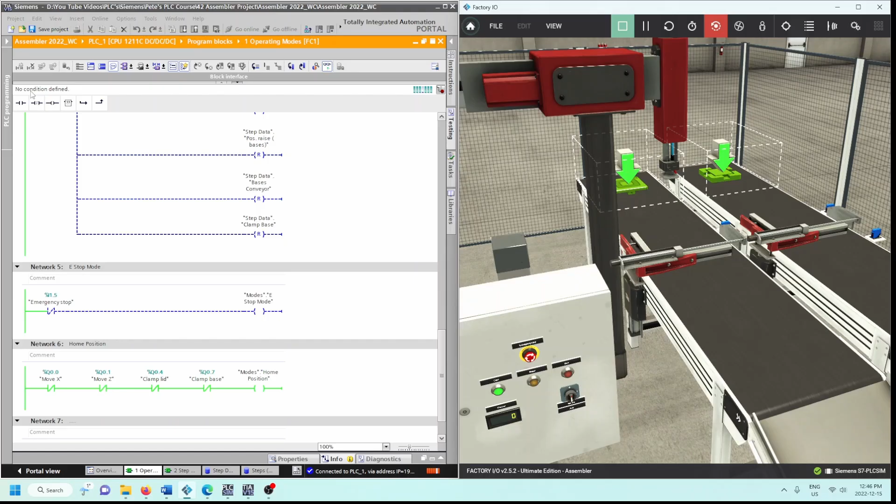Okay, let's take a look at our step definition now. So our first network right here is not going to be intuitive to you. So this is an addition that I put in here. So you can try it without this network and then try it with this network and see whether it works better for you. So in this case, every network here within my step definition moves a value right here.

This is going to move 1 into my database next step, right? That is found over here in my steps, and steps just has next step and current step, and we mentioned earlier that they're both integer values. Okay, so it moves it over into next step. You can see that the next network here, network number 3, moves 2 into next step, right? So each step value gets moved into next step.

Then at the top of the program here, so the scan is going to go down to the bottom, right? Move a value into next step. But I didn't want it to go like 4, 5, 6, right? Like go through a number of steps without being confirmed, and have me in control of the steps. So next step is then moved here, right? So next step goes into this move function, and next step is moved into the data block for current step.

And then I take a look at current step, right? So I have 2 separate databases, right? Next step and current step. And I can't go forwards until this has happened. The value that was moved into next step is moved into current step, and then I say, okay, is current step equal to 0? Is current step equal to 1? Is current step equal to 2? Okay, so hopefully you can see how this one for me was crucial in stopping the steps from sequencing through without me being in control.

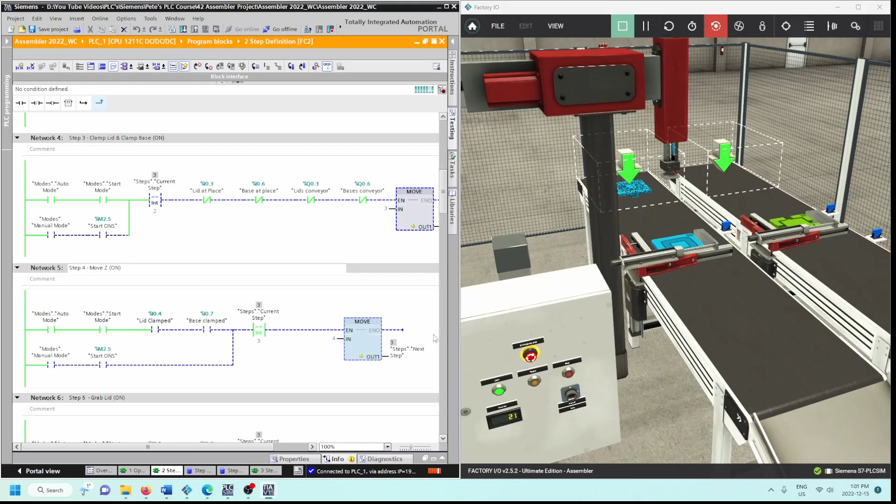Okay, next thing is to turn on the vacuum, so the grab lid. So in this case, for network number 6, auto mode is true, start mode is true. I'm no longer moving the Z axis. Okay, so it's come to a stop. The item is actually there, it's been detected, right? So I'm moving this down, item's been detected, turn the vacuum on, and I can only do that if step number 4 was my previous step. Okay, so that moves step number 5 into next steps. Beautiful. And then again, next step goes into current step at the top of the program.

And again, you'll see here for manual mode that all I've done is just put manual mode and the start one shot in parallel with all the initiating contacts here. As long as these are true and the previous step was 4, then move step number 5 into the next steps.

Okay, next one is that I want the clamp lid off. So once I've turned on the vacuum there, then I want this to release. So auto mode is true, start mode is true, the grab is true, so I've actually grabbed onto the lid there. Previous step was number 5, move 6 into next steps, and step 6 is going to turn off the clamp lid.

Okay, again, manual mode is just simply manual mode, and start one shot in parallel, going around the initiating contacts. As long as my previous step was step number 5, manual mode is true, start one shot has been pressed once again, then move 6 and clamp the lid. Okay, we'll see that there's no execution of anything. The execution of all this is in a separate function.

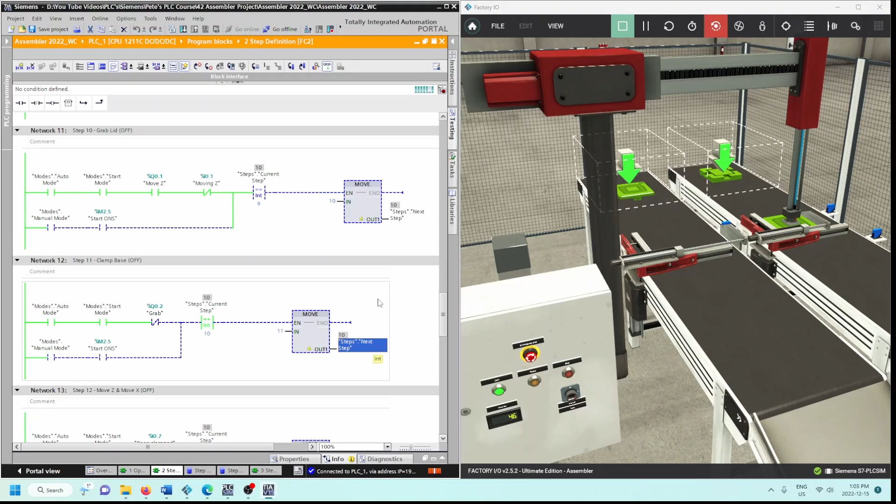I'm saving, resetting the circuit, and then going through each one to make sure that my automatic mode works before going on to the next network. Okay, so automatic mode, start mode is set. The grab is no longer true, so I'm no longer suctioning that component. Previous step was step 10, move step 11 into next steps. And again, just as I said before, manual mode and start one shot pulse are in parallel with all the initiating contacts. As long as this is pressed, previous step was 10, move 11 into next steps.

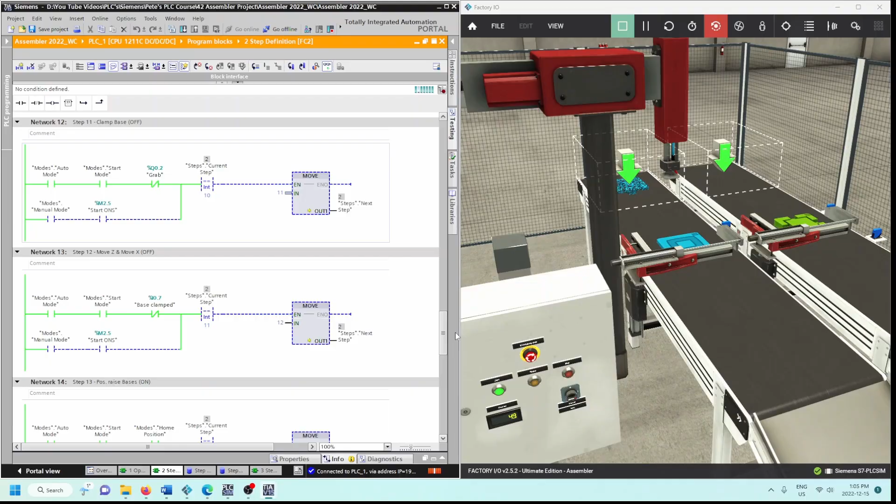Okay, next one, guys. As soon as I've let go of the part here and the clamp base has been released, then I want the unit to come up and back to the home position here. So at that point, auto mode is true, start mode is true. The base is no longer clamped. Previous step was step 11. So move step 12 into next steps and move the Z and move the X off, right? So that'll move it back to this position right here.

Beautiful. At that point, I want the positive raise bases to lift up. So that would be right here, right? So that lifted up. Okay. And again, that can only happen if the previous step was step 12. So step 13 gets moved into next steps and positive raise bases is on.

Okay, at that point, the next thing I need to do is turn the conveyors on, right? So auto mode, start mode, positive raise bases is true, positive limit bases is true. Step 13 was my previous step. Move 14 into next steps and turn the conveyors on. Okay, if I wanted to do that in manual mode, I would have to be set in manual mode and press the start push button once again.

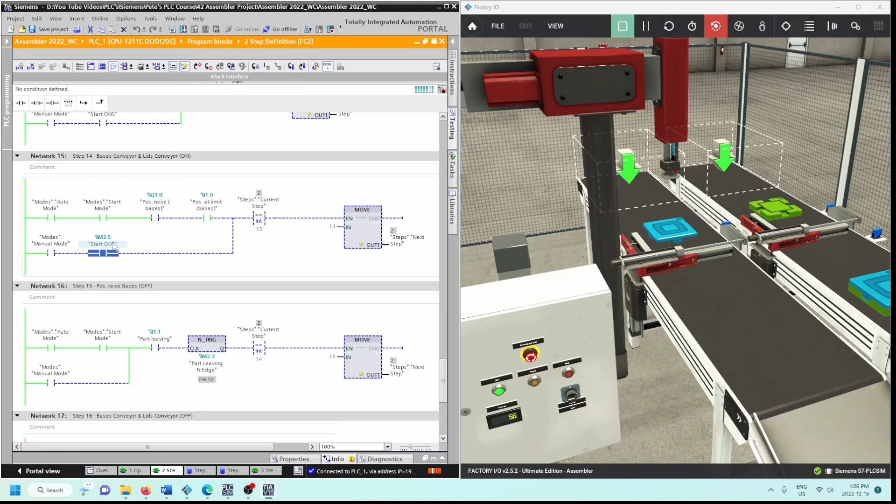Okay, from here on in manual mode, I no longer have to hit the start push button because it wasn't intuitive for me to have somebody press the push button to have this go down and to turn the conveyor off, right? So that's why that little hiccup there is there on the back end. So step 15 is the positive raised base is off. So auto mode is true, start mode is true, just like every other network.

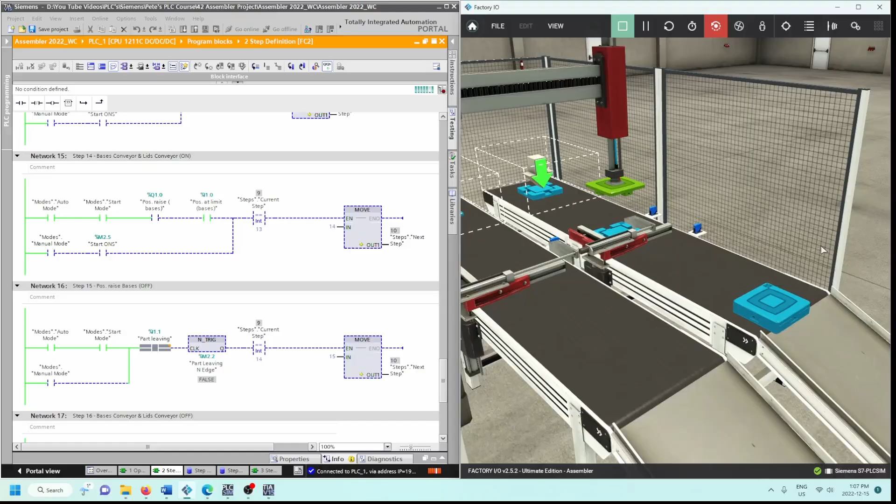Part leaving, so that is this sensor right here, right? So this guy right here, when the part is leaving, then the negative edge is tripped. So the part has to come back by, go to a 1, go to a 0, the negative edge is tripped there, and then the unit for the positive raised bases goes down. Okay, and it can only happen if the previous step was 14. 15 gets moved into next steps, and the positive raised bases goes down.

Beautiful. Then I want the conveyor to turn off. The reason for that was because I have parts still moving and they were smashing into here, so I stopped the conveyor there. Manual mode does that on its own as long as step 15 was true. In automatic mode, auto mode has to be true, start mode has to be true. Previous step was 15, and move 16 over to next steps and turn the conveyors off briefly.

Okay, that's that little brief hiccup you'll see, hang on, right here. Conveyor will turn off there, that little hiccup there. And that was just because in manual mode, I needed that to happen. If you can fix that for me, awesome, show me how to do it.

Okay, and then finally, I need to reset everything. I want to go right back to the top and have the sequence keep going. So auto mode is true, start mode is true, just like every other network. I'm back in the home position. So in the home position, if I go to my operating modes, my home position was that move X is off, move Z is off, clamp lid is off, and clamp base is off.

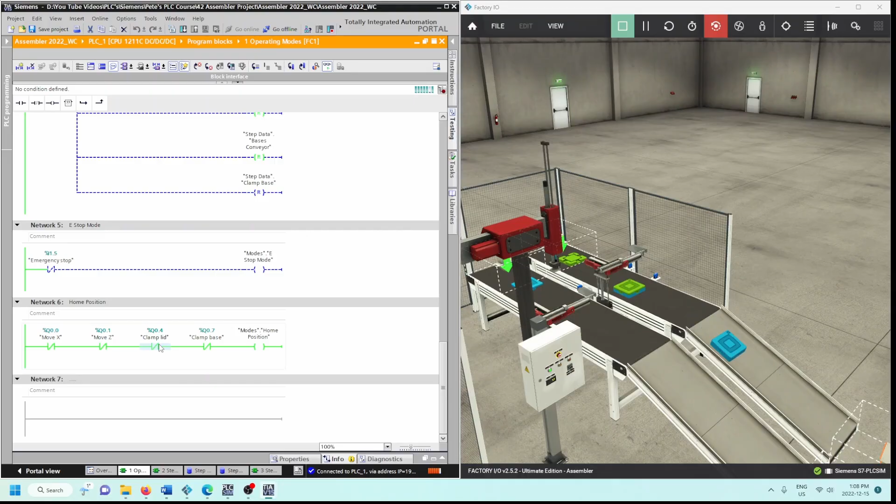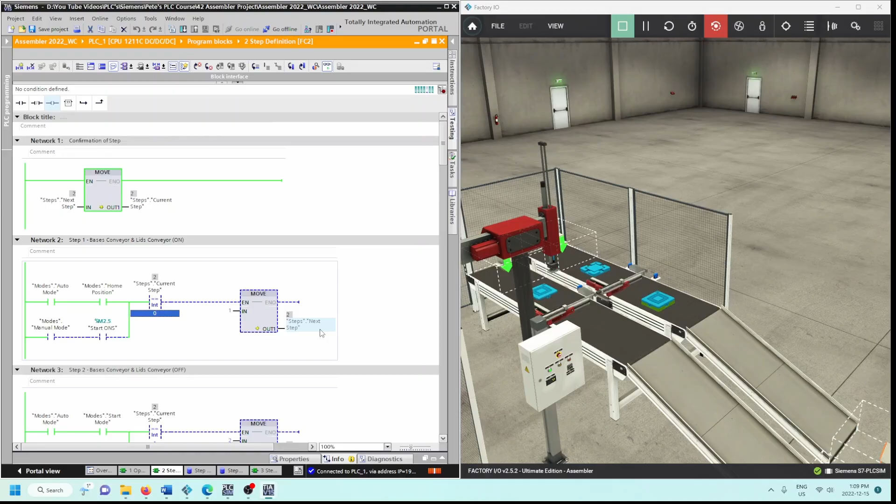So if those guys were true, easy now, and step 16 had already been set, then move 0 into next steps. And by moving 0 into next steps, then we move all the way up to the top here, starting here at step 0. And again, with all of these guys, it has to wait for each scan, and next step is moved over to current step, and then I can compare it to each of these values. So now the sequence keeps going.

So I would say that this program is pretty good so far. We have had 71 different parts come through, and we haven't broken it yet. Okay, let's see if we press the stop push button. So let me get this set up so we can press the stop push button.

Okay, at that point, everything stops. We're currently in step number 2. So when we press the start push button again, then we should move on to the next steps, right? So it should always hold that position for that step. When we press the start push button again, then we should keep going.

Okay, so there I broke it, right? So something was missing there for the stop. That's frustrating. So I'll have to take a look at my program. I'm not sure what was missing there. We were at 73, we were doing so well.

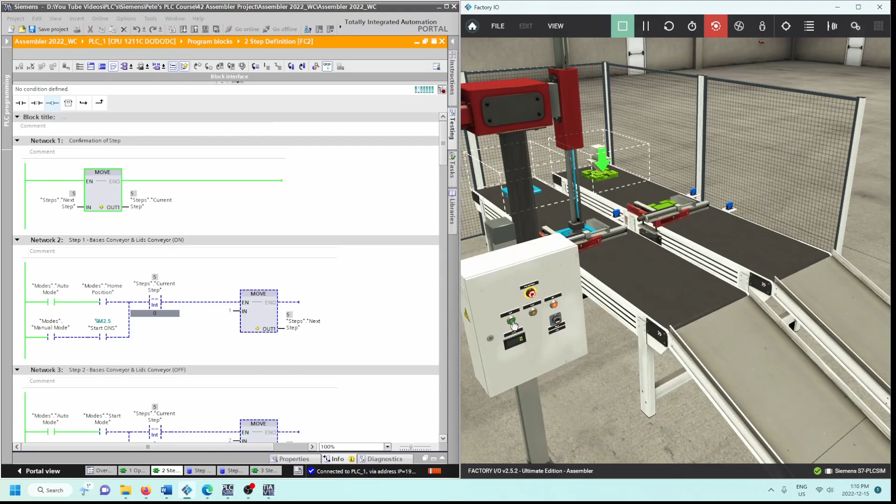So if we reset it, it goes into manual mode. There's our automatic mode. Let's see if the stop sequence stops maybe right here. Okay, so step 5, press the start push button and it should continue. Okay, that's cool. Not sure.

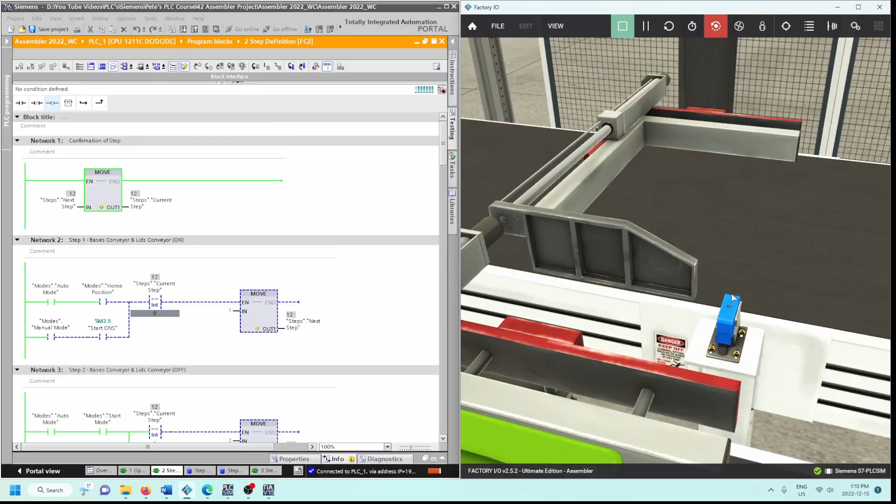It's probably the issue with my program, and with yours as well, is going to be this sensor right here. So this guy right here looks for the negative edge of the part coming through right there. And so if that negative edge hasn't happened, then the rest of the program is not going to move forwards. I would find that the better setup would be for this to be moved over, like angled a touch, to actually see that the part is in place. But that's not what they were looking for in this setup. They were looking for the negative edge there. So for me, this sensor is what continuously breaks my program.

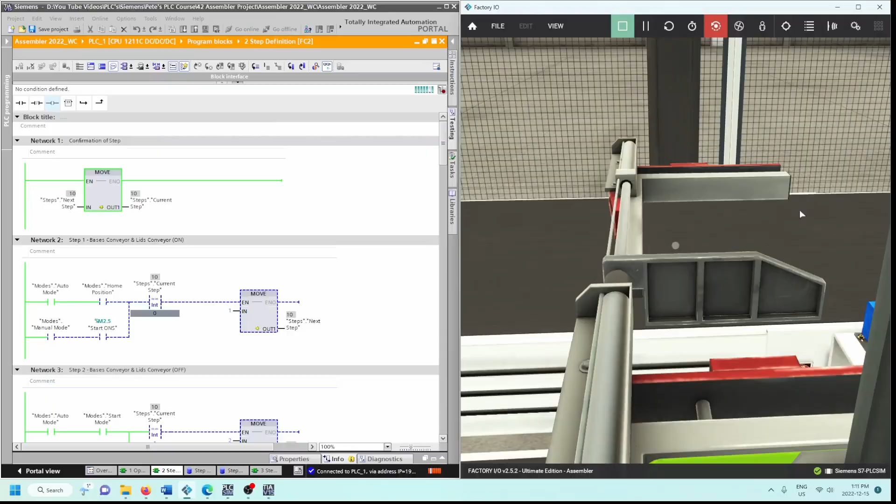Okay, so we've seen that the stop was working there. Let's stop it in a couple more spots and make sure that everything keeps going. So we'll stop it right there. Currently on step 10, we'll press start again and see if it continues on. Very nice. Okay, looks good. And we'll stop it maybe one more time here. Okay, currently on step 4, press the start again and it should start from step 4. So beautiful. Excellent. Okay, so everything's rocking and rolling here.

Let's hit the E-stop now. Okay, we hit the E-stop, flashing light here. Everything has come to a stop. I'm going to put the E-stop back to its rest position. And then I'm going to hit the start push button, and we'll see, we're currently in step 4. We'll see, nice, everything keeps going. Okay, let's wait for it to get through.

Let's put the E-stop over here and see if everything's cool over there. Okay, so at that point we hit the E-stop. Everything's come to a stop. We check to see what the issue was with the operator there. At that point we put the E-stop back to its rest state. The red light goes back to solid red. Press the start. We're currently in step 10, and yes, we keep going in the sequence there. Beautiful. Okay, so hopefully everything makes sense so far in the automatic mode.

Let me show you the manual mode now. Okay, so let's take a look at the manual mode. So I have reset the animation. Every time that you reset the animation, it seems to go to the manual mode here. Okay, so we're good there. It's waiting on the start one shot now. At the moment, my steps are 0, right? So current step is 0. I'm going to press the start.

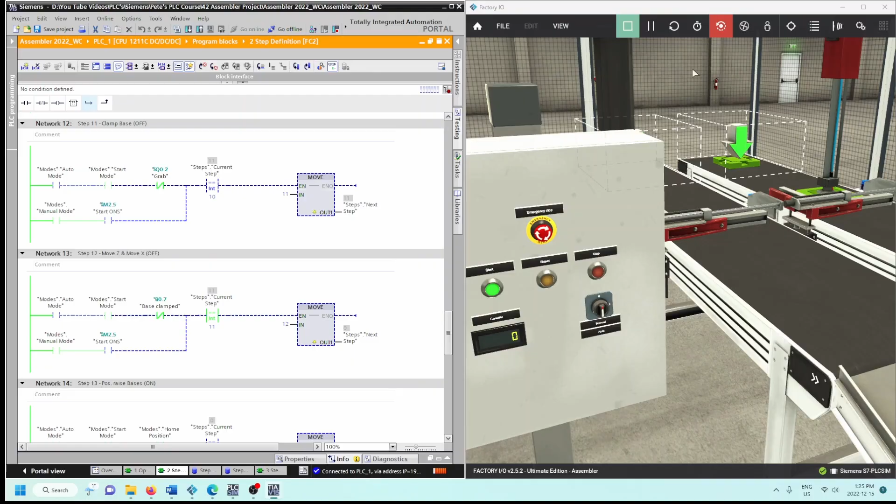Beautiful. Next step is that move Z and move X are off. So that's going to bring this up and back to the home position. Beautiful. Okay. Step 12, we did step 12. Step 13, pos. raise bases is on. So that will lift this up. Very nice. Okay, so step 13 is confirmed.

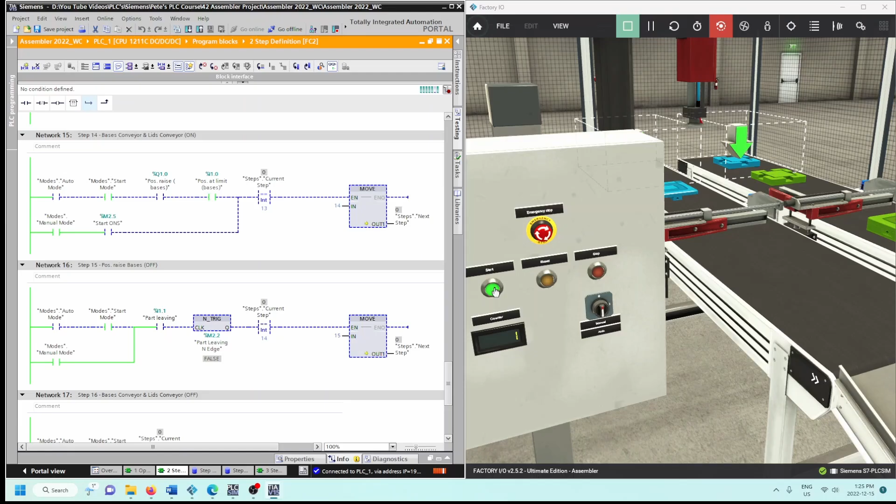Step 14, turn on both the base conveyor and the lid conveyor. So pressing the start push button now, both conveyors turn on. And you'll see that this dropped down right away and the conveyor turned off. That is because, if we take a look here, I didn't think it was going to be intuitive for an operator to press the start push button to have this drop down or to stop the conveyor.

So you'll see that manual mode goes straight to here. And as long as the part leaving, so that's this sensor right here, as long as that has seen the negative edge, so it's gone to a 1 and then to a 0. Once that's happened, and step 14 was our previous step, then we have the pos. raise bases off, so this

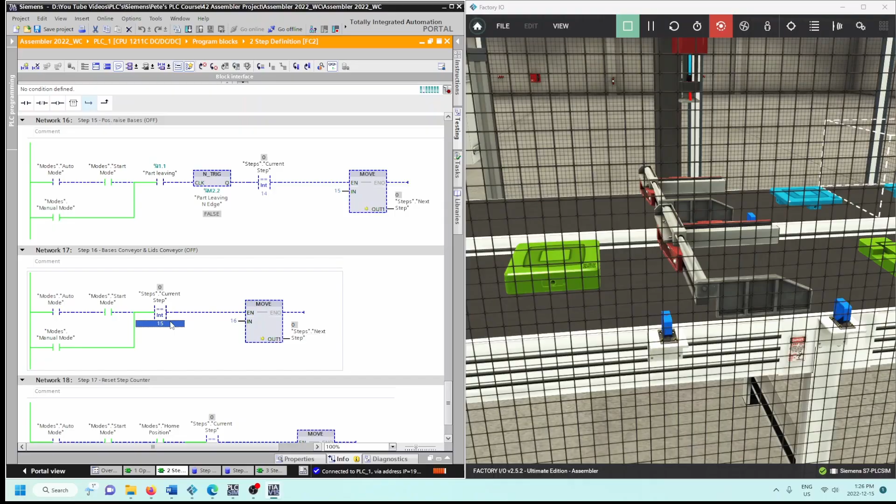drops down. And then at that point, I also turned off the conveyor because I had an issue with parts coming through and smashing into this guy if I had waited too long to hit the start push button. So this and this have the manual mode going straight to the move function here, as long as the previous step had occurred.

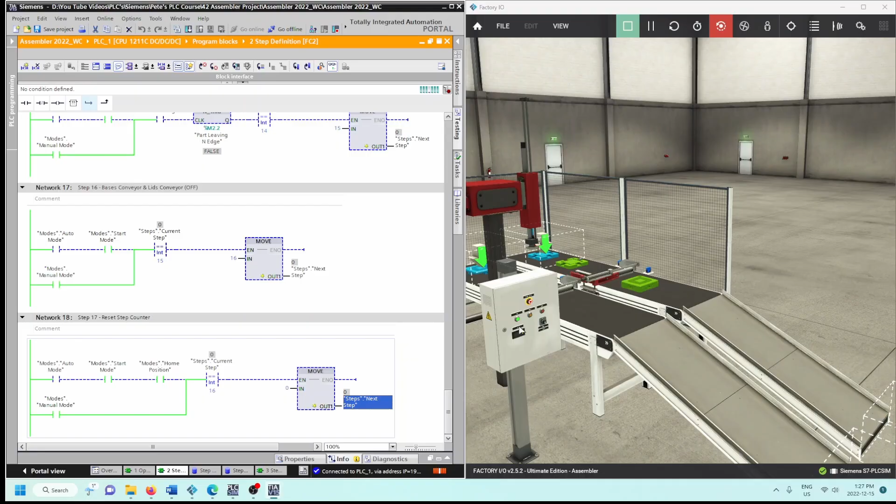Okay, so last step here, guys, is to, again, automatic. If I go down here, manual mode brings this automatically. If step 16 has happened, if the conveyors have turned off, then I'm going to move a value of 0 to next steps, right? So that brings me right back to the start, and then restarts the animation. So all of the manual positions have been able to work with each press of the start push button. Let me just zoom in here one more time, and we'll take a look at this one more time just to make sure everything's cool.

So pressing the start push button turns this on, closes the clamp lid and clamp base. Z goes down, vacuum turns on, release that, bring the Z up, move the X over, turn the Z on again. There we go. Release that clamp. Sorry, release the vacuum, release that clamp. Okay, positive. Then the Z and the X go back to the rest state.

Beautiful. This lifts up, conveyor turns on, and see, there may be a little issue with parts there, right? So we'll have to play around with that with the timing of everything. Okay, so a little hiccup there, but let's see if the sequence works, and then I'll show you how you can go from manual mode to automatic mode. So just making sure that sequence works properly here.

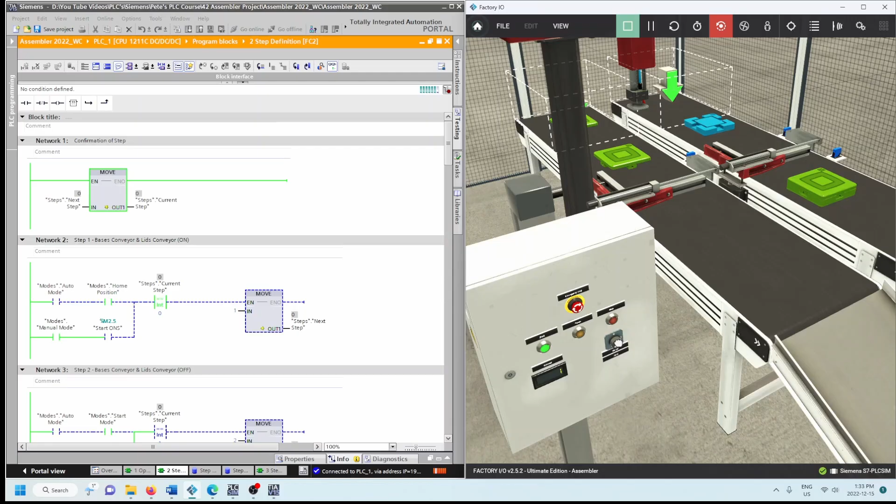Beautiful. Come down, grab it, let go of that clamp, lift it up, move it over, drop her down. Beauty. Let go of the suction cup. There we go. Go back to the home position. Looks good. Then this is going to raise up. Next time the conveyor is going to turn on and turn off. Beautiful. Okay, so at that point, I'm going to move this into automatic mode, and it should run perfectly now.

Okay, so hopefully everybody's cool here with the step definitions. I'm going to take a break here, come back to you in the next video, and we're going to take a look at the step executions.